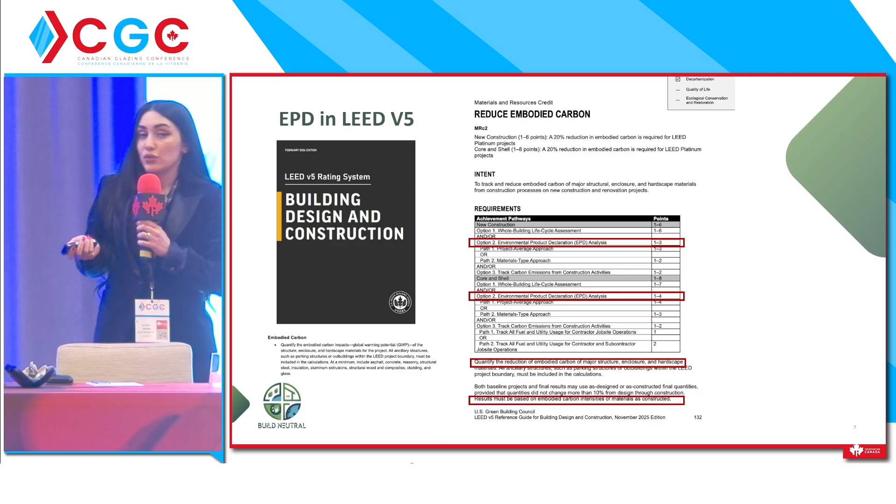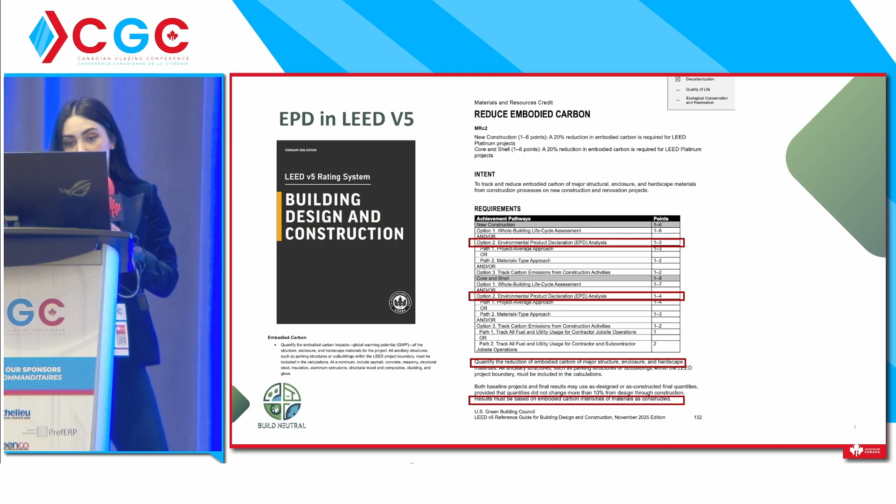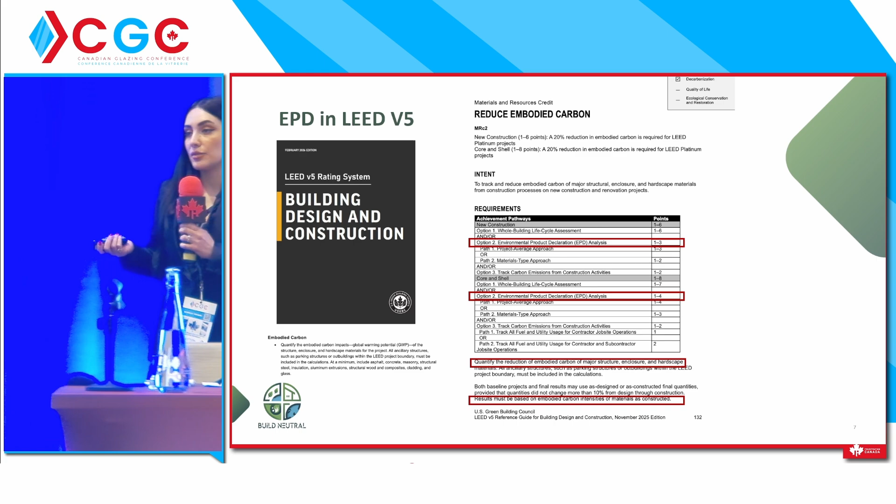So in the LEED V5 that came recently, it says for new construction, we need EPDs. It has a point. For core and shell, again, we need EPDs. And I put it in here as quantify the reduction of embodied carbon of major structure, enclosure, and hardscape materials. And then it says, results must be based on embodied carbon intensities of materials as constructed. So this whole EPD is really gonna help people to get all the points they need for LEED or other certificates.

And then in Canada, we have this standard on embodied carbon in construction. In section 3.2.3, it says: please include the following requirements in the procurement of construction services. Ensure that embodied carbon disclosures for structural materials are secured by the organization before project completion, and that they list the required information for each type of material identified in Appendix B, and then disclose the embodied carbon footprint, etc., EPDs. So if you want to sell your product on a government project and you want to follow these standards, here EPD comes for you.

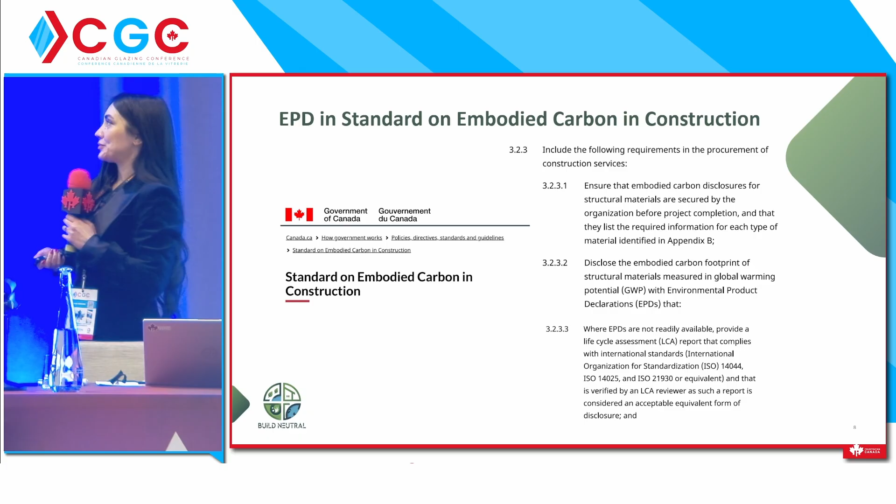And then Bill C-59 tells us that when you are talking about the sustainability of your product or your business, you can't just say, my product is sustainable, my product is net zero, my product is neutral. These are all greenwashing. You need to have backup data for your claim that uses an internationally recognized methodology. And the good news is that EPDs and LCAs, life cycle assessment and environmental product declarations, are internationally recognized methodologies.

So, the purpose behind EPDs: shift the market to lower impact products. Customers are demanding, then as a manufacturer, you are going to produce products that have lower carbon emissions. Then you are going to reach out to your suppliers: please provide me with your most sustainable, low carbon emissions product. So this is going to go on, and hopefully we are going to have products with lower environmental impacts.

EPD provides verified, comparable facts. The whole point of these EPDs is for us to see, okay, we have this window and that window, how can we compare them. That's why we have PCR, product category rules; moving forward, I'm going to talk about all of these in detail. But the goal is to compare different products with each other if they are apple to apple, like this window with that window.

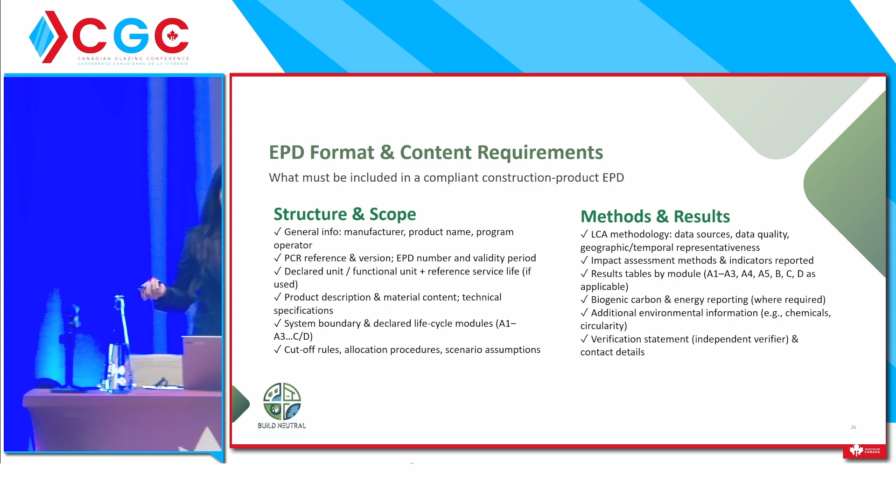So these are EPD format and content requirements. General information. You need to disclose what's the manufacturer, where is the location of the manufacturer, what is the product name, and also who is the program operator for this EPD. Because when we disclose the program operator, we are following the general instructions of the program operator as well. Some program operators don't allow, for example, white label. Some do. So this is important.

PCR reference, the most important one. Sometimes people tell me, okay, these EPDs are not comparable. I'm like, are they following the same PCR or not? If they are not following the same PCRs, definitely you cannot compare them, because each PCR has different rules. So the other thing you need to pay attention to: are the PCRs the same?

In EPDs, we have declared unit or functional unit, reference service life, how long your product lasts, system boundary, life cycle modules. Are you only talking about A1, A2, A3, which I'm going to talk about, those stages, or not? And then we have methods and results in EPDs, like what methodology we use as LCA scientists, what's the geographical or temporal representativeness of the data, and if your product has biogenic carbon, if it's like wood, how I'm modeling that. They all need to be disclosed.

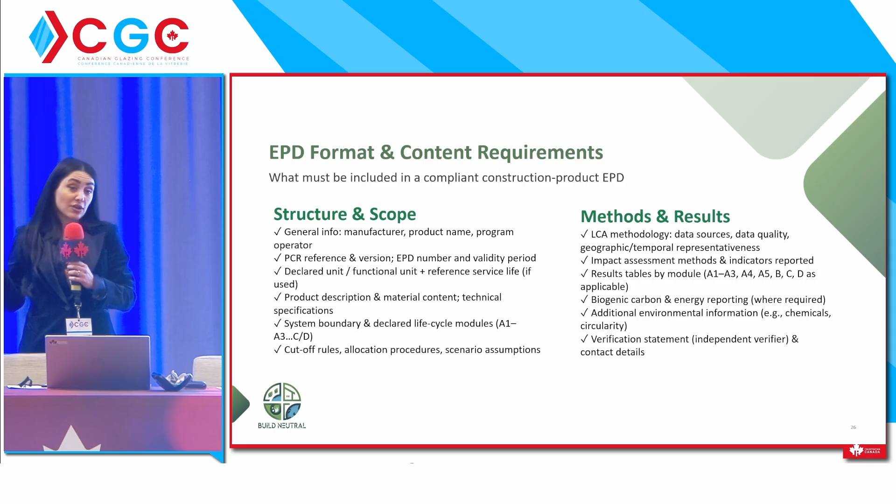And the most important one, you need to see the name and signature of the third-party independent verifier. If the EPD is not third-party verified, it means that the company developed the LCA themselves, they self-declared it, and it's not type 3. Type 3 must be verified by a third party. There are EPDs out there that are self-declared. You just have to know what's the difference, what's the reliability that you can have on their data.

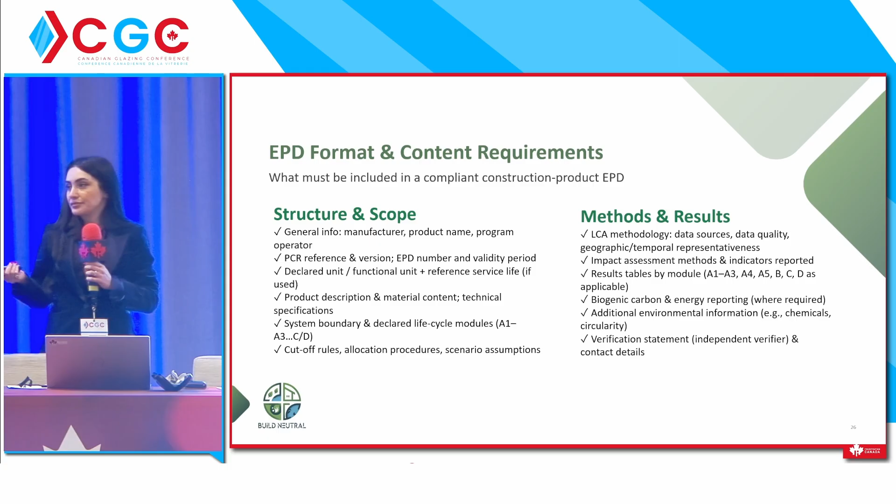Versus if it's, for example, cradle to grave, you have to report to whom you are selling. For example, 80% of your product is sold in Metro Vancouver area and 20% is in Alberta. Then we need to calculate what's the average transport. And then when it's installed, how you're installing it. Does it need repair? What's the maintenance, replacement, refurbishment?

What's the energy use? Like, for example, in the window, what's the operational energy based on your window? How much energy are we losing in here? Water use, you don't need it, but for some products we do. And then what happens at the end of life? One important stage that I'm gonna talk about in detail is the replacement one.

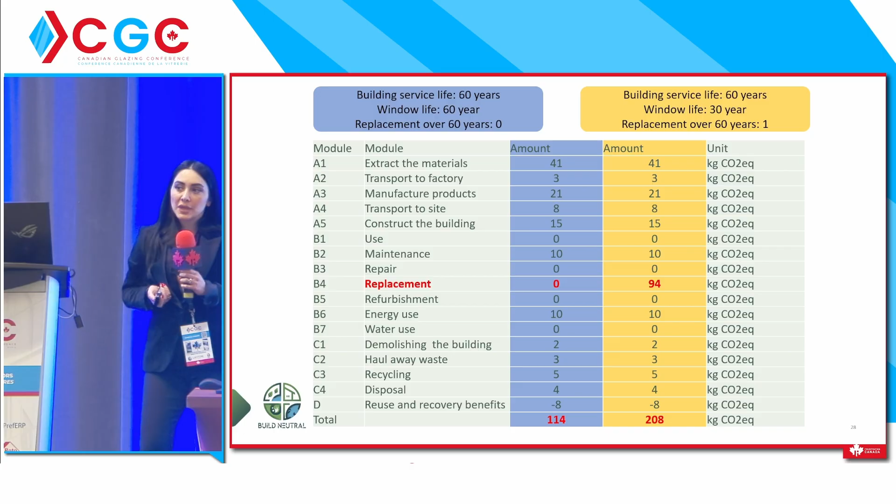And then if you are recycling or landfilling, again, at the end of this building, how many times you are going to recycle your products if you are replacing it more and more. So I put some imaginary numbers in here. Let's assume A1 is 41, for a building service life that is 60, and a window life is also 60. So when you are building this building, windows are there, you are not replacing them anymore. And that's the blue column.

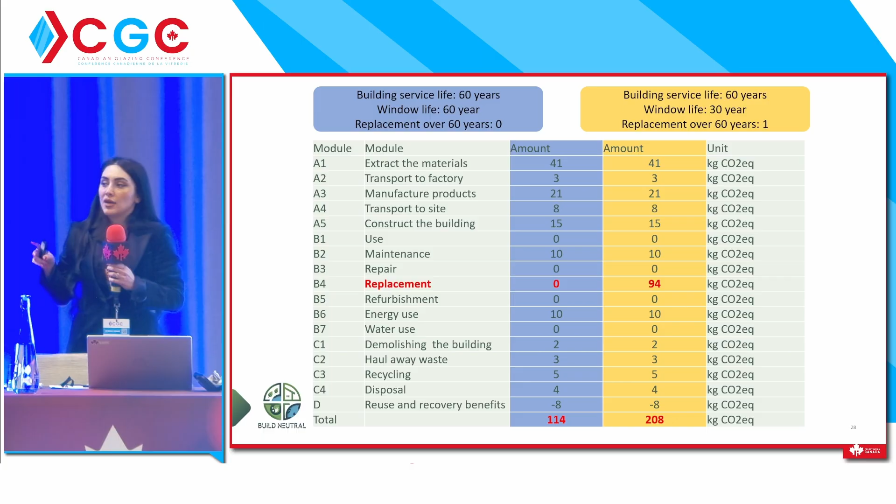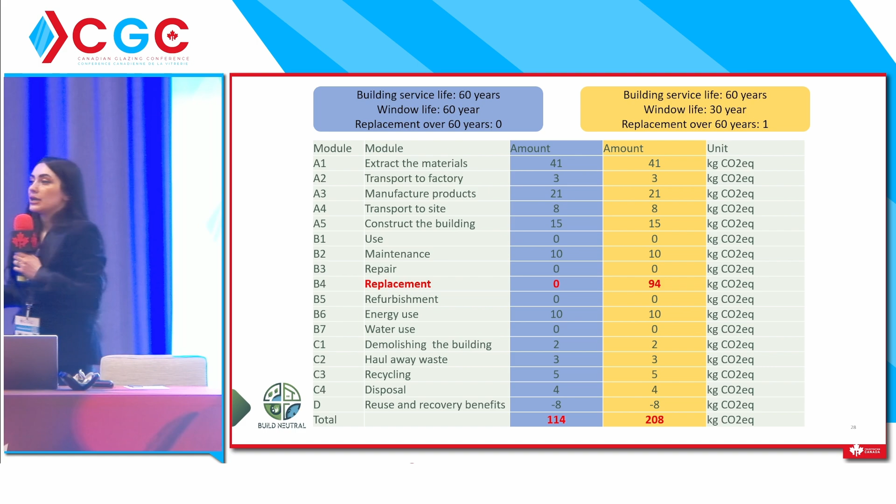Then you have another window where the life of the window is 30. So over the life of this building, you need to replace this window again. Let's say A1, A2, A3, everything of these 2 windows is identical, but one window is getting replaced 1 time more. And that replacement number comes from A1 to A5 and C1 to C4, because you have to produce that product again, transport it again, recycle the previous one, or landfill it. And then the total global warming potential of your window over the life of a building is almost double.

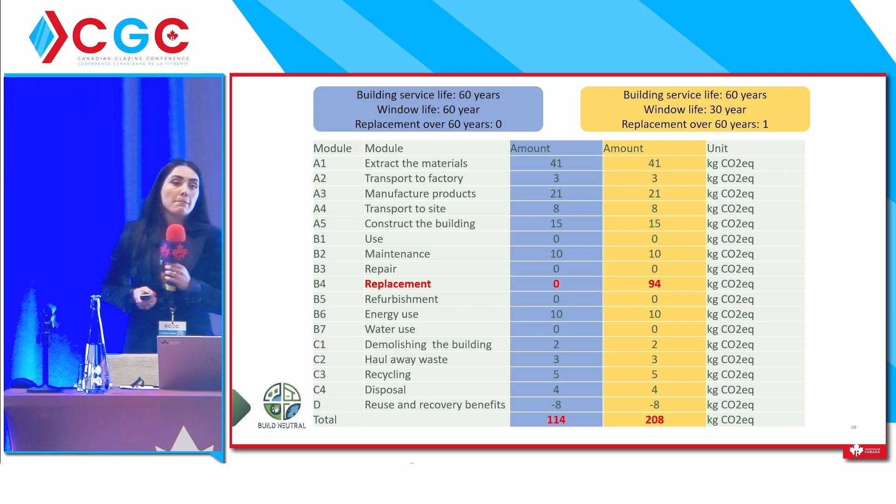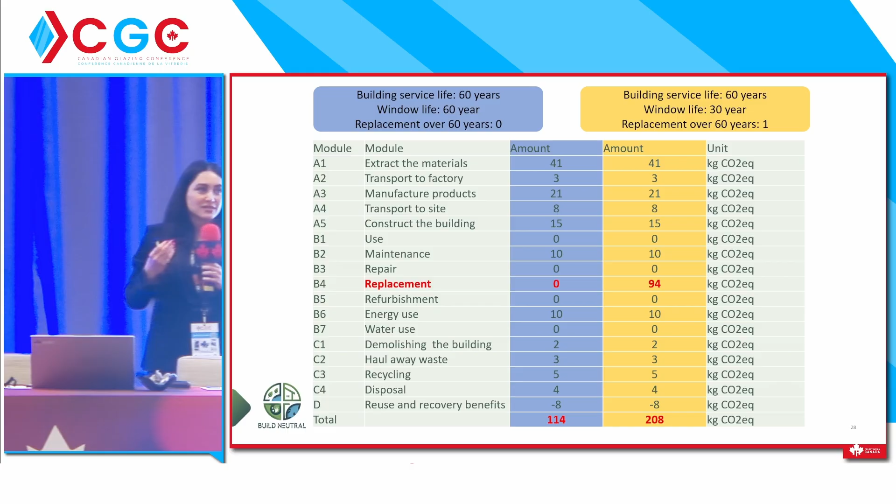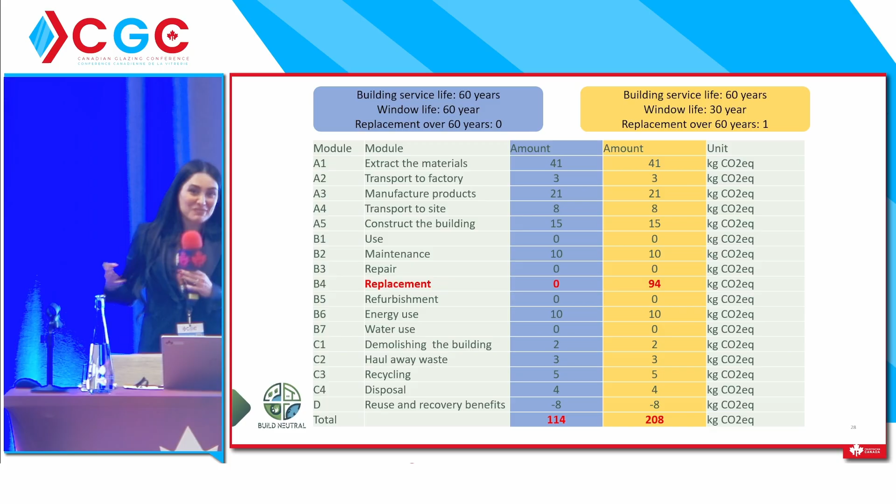So replacement does matter. Durability does matter. But it depends how you are modeling the system. But I also understand the current PCRs, it's written in them. The reason they are only considering A1, 2, and 3 is because that's a challenging part. In the PCR, it's written because you can use different materials in order to install. Yeah, they skip it overall. But you should sit on those committees to improve that PCR, because the whole point of life cycle assessment is whole life cycle thinking.

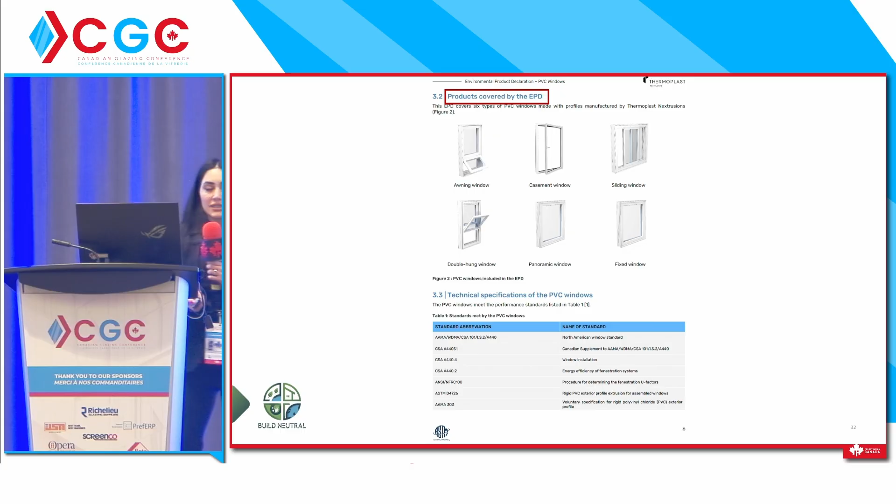So what products are covered in this EPD? We need to mention in detail. And they put a picture, great. Technical specifications of the PVC windows provided, great. So product description, these are all mentioned because the PCR wants it.

So if you want to see some information that's not in those EPDs, maybe in the next round of PCR development, you should be there and say how important it is to have this information and make it mandatory. Because when it's mandatory, the person who is developing that EPD must put that information in it in order to be verified.

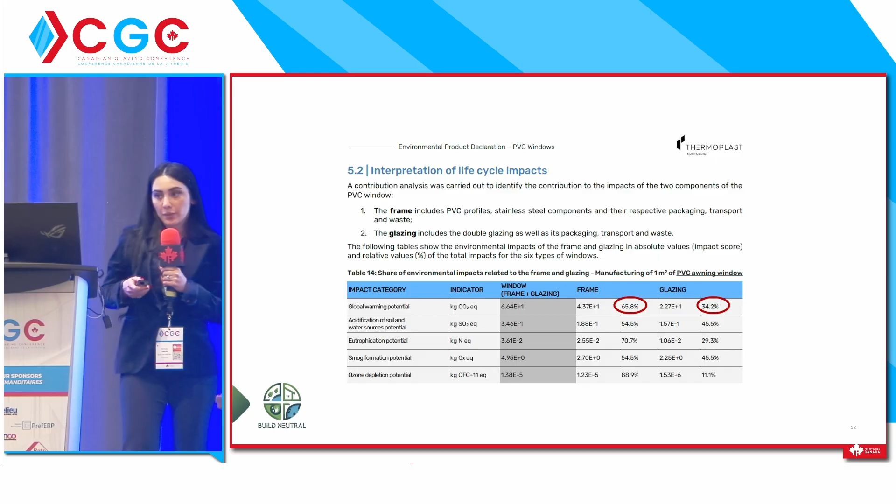So the takeaway: know which program operator you want to go with if you have a preference. But it doesn't always come down to preference. Sometimes, most of the time, it comes down to money. They have different prices. You have to pay to develop your EPD, and then you have to pay to verify it. And sometimes you have to pay the program operator annually. But it depends. For example, for ASTM, it is only around 6,000 for verification and having it forever on their website. But there are other program operators that could cost up to $17,000 over 5 years because they charge you an annual fee, and on top of that, they charge you for verification separately.